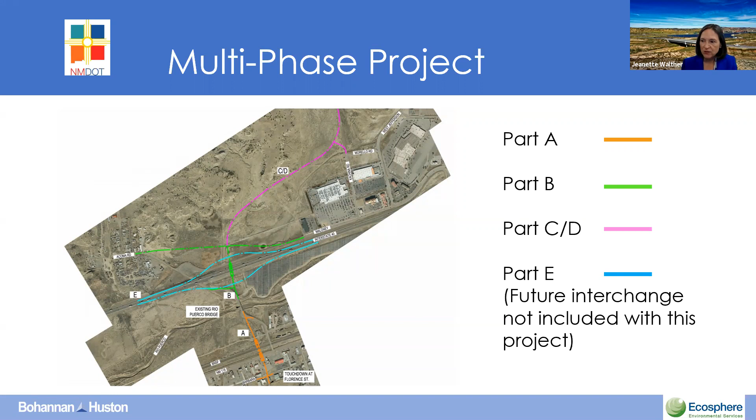Part C and D, shown in pink, will connect Allison Road to Kachina Street, and there will also be a connection back to Kachina Road. The design will accommodate a future interchange shown in blue, but that interchange is not included in this project because there's not enough traffic at the location to warrant an interchange. When construction is complete, there will be a 2-lane road from one end to the other.

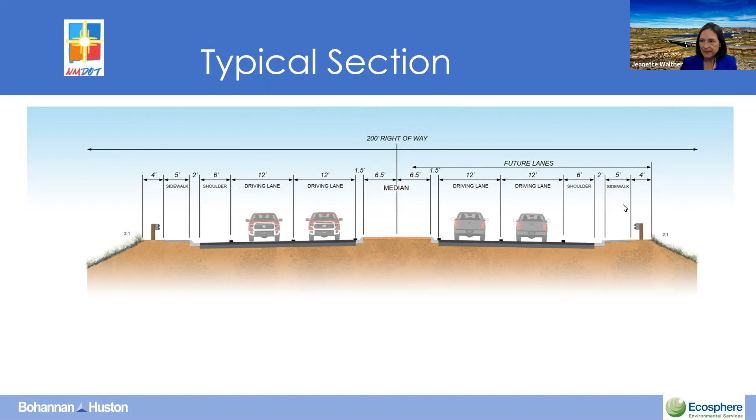This is a typical section of the roadway. Right-of-way will be preserved for a future 4-lane road. There will be 2 lanes in each direction with a raised median in the middle that will accommodate left turn bays. There'll be a 6-foot shoulder on both sides for bicyclists and a 5-foot sidewalk. Sorry, I went too far.

There. South of New Mexico 118, the road will have a wall on either side since Allison Road is going over New Mexico 118 and the BNSF Railroad. The wall will be approximately 20 feet in height closest to the bridge and taper down to 5 or 6 feet near the Barbara intersection. This is to minimize impacts to right-of-way in this area.

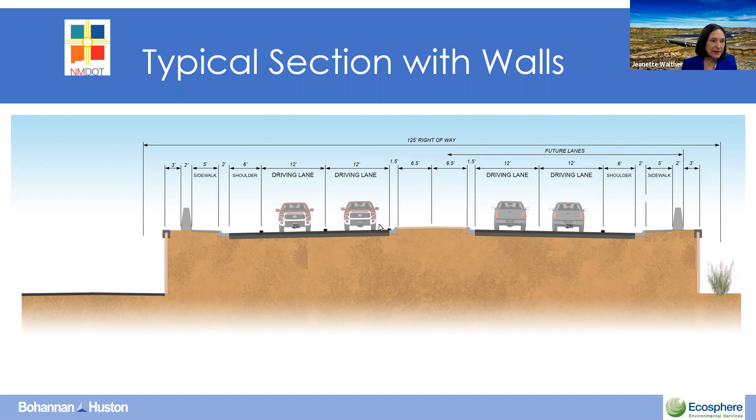But as I said, only a 2-lane road will be constructed with the current project. There will be a shoulder on both sides of the 2-lane road for bicyclists and a sidewalk on both sides. The additional 2 lanes will not be constructed until the area develops.

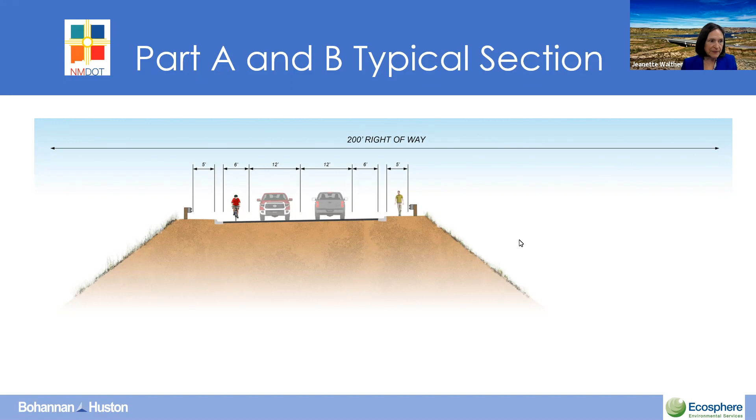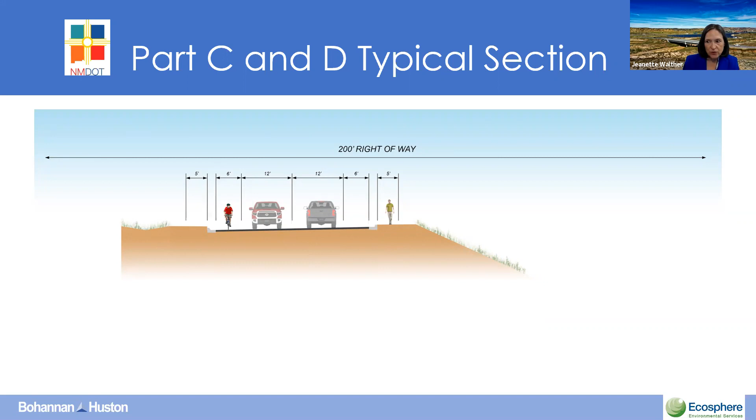North of Interstate 40, Allison Road will be much closer to the ground. There won't be as much raising of the ground level. It will still be a 2-lane road with shoulders and sidewalks.

This is a new road, so quite a bit of right-of-way is needed, including 1.6 acres south of New Mexico 118 and 31.2 acres north of I-40. In addition, approximately 12.5 acres may be needed for ponds.

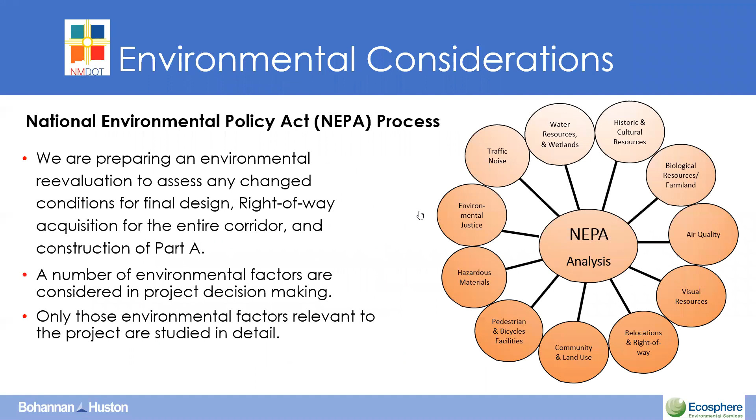I have property located on Barbara Street where the flood containment ponds is going to be, on the west side of all the work on that one. What are going to be the effects of the flooding issue towards the properties, or is it going to try to contain most of that?

Right now the Barbara and Florence intersection is a low point, and water builds up there each time it rains. The plan is to raise this intersection up, which will essentially block the flow. So the plan is to put drop inlets in on either side to pick the water up and take it to one of these pond locations. That should contain a 100-year storm.

Okay, and you'll have further research and development on those ponds and the capacity they can hold in? Yes, we need a geotechnical investigation to be done before we can finish sizing them.

Okay. And did you say that one of these is your parcel? I don't own where the pond sits, I own directly west of that pond, the assisted living home. Yeah, I own all of that Barbara Street from there on.

So we were just concerned about the development on that side there.

Jeanette, I guess just to add to what you said, there will be drop inlets and storm drain installed, not only on Barbara and Allison, but on Florence. So any drainage issues that you're currently having in front of your property will be effectively addressed with the project.

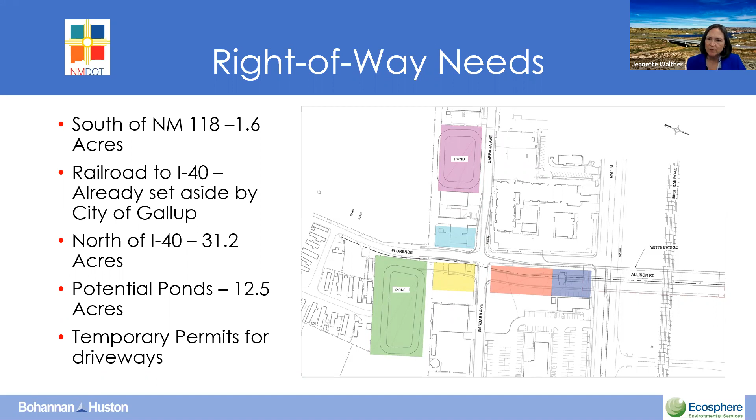That's fine. Where would you like me to put my contact info, you want me to put it in the chat, or what's the best way to get it to you guys? You can do that, or you can fill out the comment form or send an email to John Tashik. Either way will reach us. Okay, I'll send it over to that email right now. Okay, great.

Thank you for your question. Does anyone else have a question or a comment they'd like to give tonight?

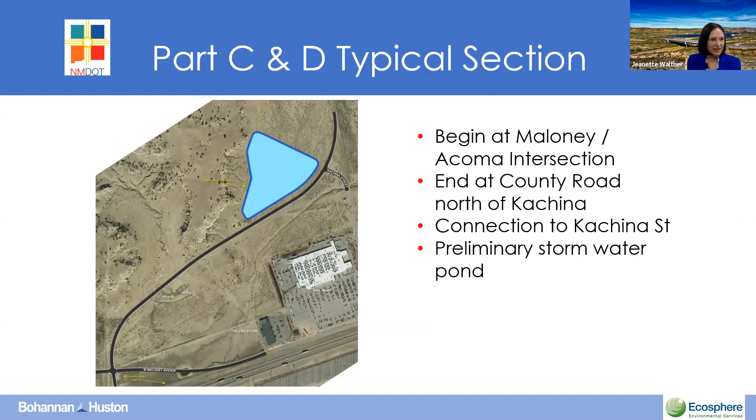Well, I'll just go back to some of the report figures. So I went back to part A, which is the one that would be constructed first, because it has some construction funding.

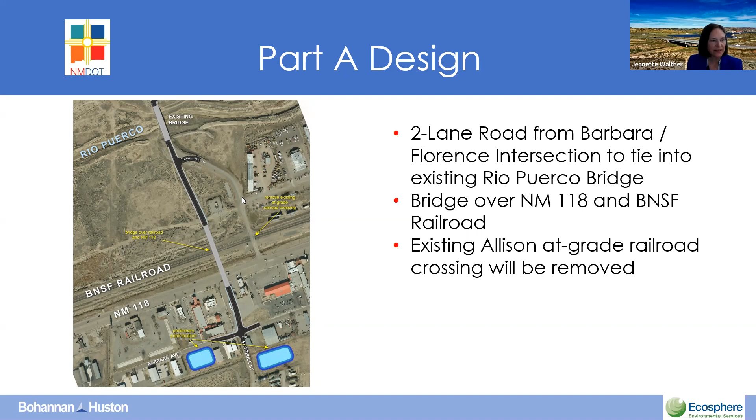Jeanette, at the beginning of the presentation you also referenced improved connectivity for pedestrians and cyclists from the south to the north parts of town over the BNSF and the river. That's an additional purpose for the project. You also mentioned the previous location studies conducted by the City of Gallup and the DOT. Those studies may be of interest to this gentleman for more detailed information on the purpose of the project and all the different alignments that were considered.

And that is true. There was a recent safety study done by another firm where they found that people were leaving the Walmart and cutting across the interstate to get down to this area, and there were a lot of accidents with vehicles hitting pedestrians on the interstate. So part of the hope is with the sidewalk along Maloney connecting to an overpass and a bridge over the river, that people will use this road instead of trying to cross the interstate.